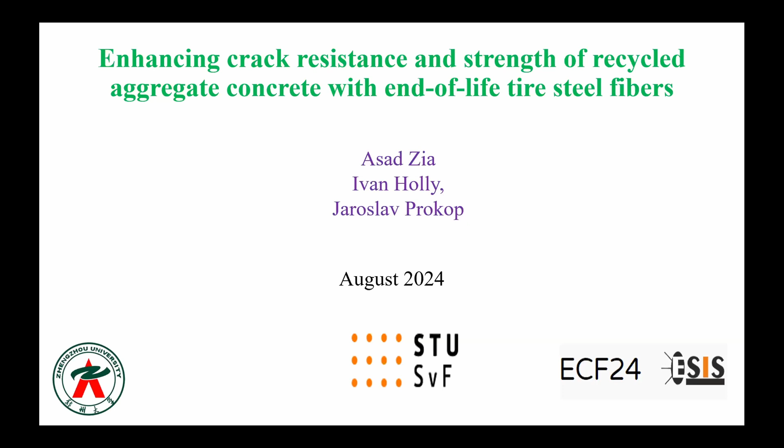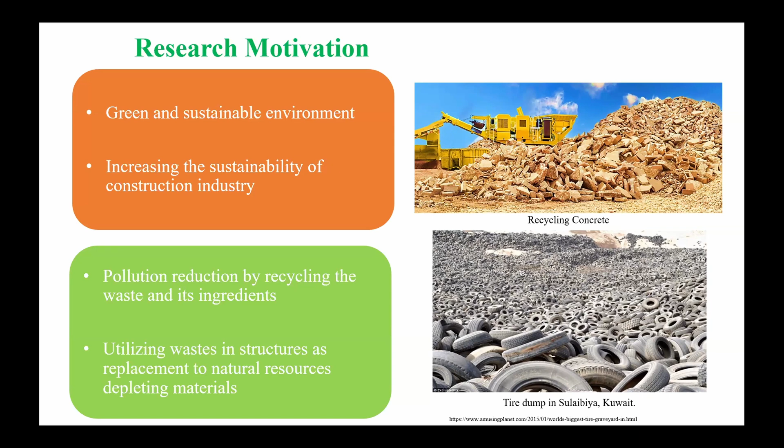The research motivation is about making our environment green and sustainable, increasing the sustainability of the construction industry, and reducing pollution by recycling waste and utilizing it in structures. Specifically, using waste steel fibers from tires combined with recycled concrete aggregates to produce new concrete, checking whether this can replace traditional concrete and achieve improved properties.

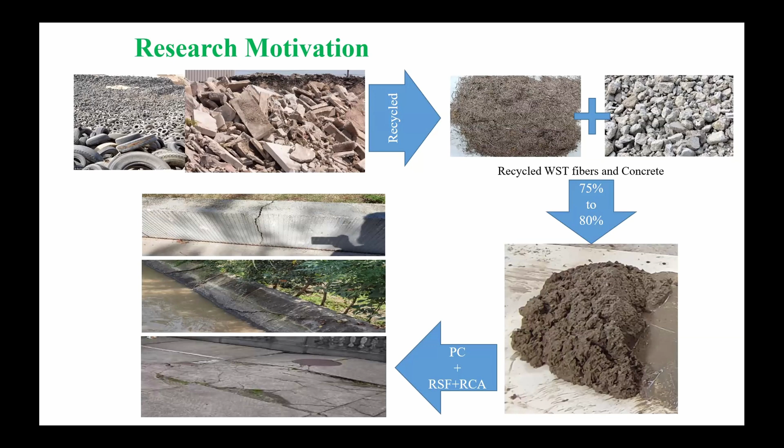There has been a lot of research in this field. Relating to pollution and waste tires, it has been predicted that by 2030 there will be up to 5 billion end-of-life tires

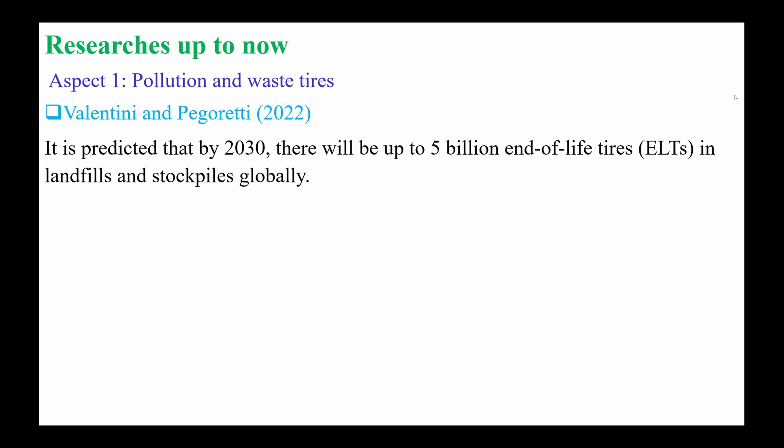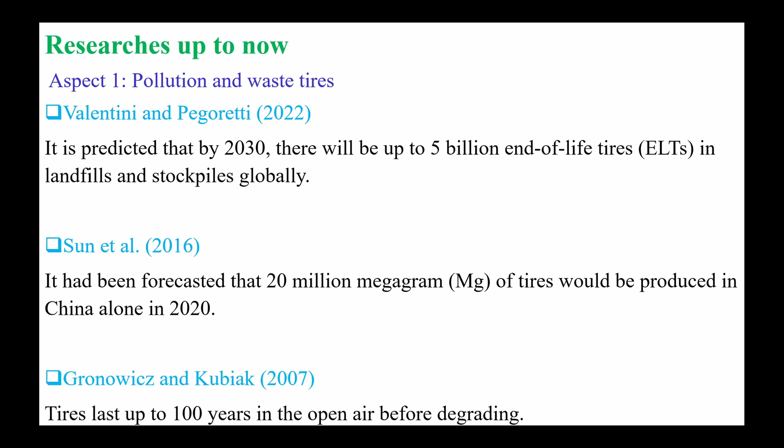in landfills and stockpiles globally. It was reported and forecasted that 20 million megagrams of tire waste will be produced in China alone in 2020. Tires last up to 100 years in the open air before degrading. The European Tyre and Rubber Manufacturing Association reported that out of the total waste tire, only a small amount, 3%, was used for civil engineering, public works, and backfilling.

It has also been reported that steel is used in tires for up to 10 to 15% of lightweight vehicles, and up to 21 to 25% in heavyweight vehicles like trucks. So discarded tire steel fiber can be used as a fiber in concrete due to its resemblance to industrial steel fibers.

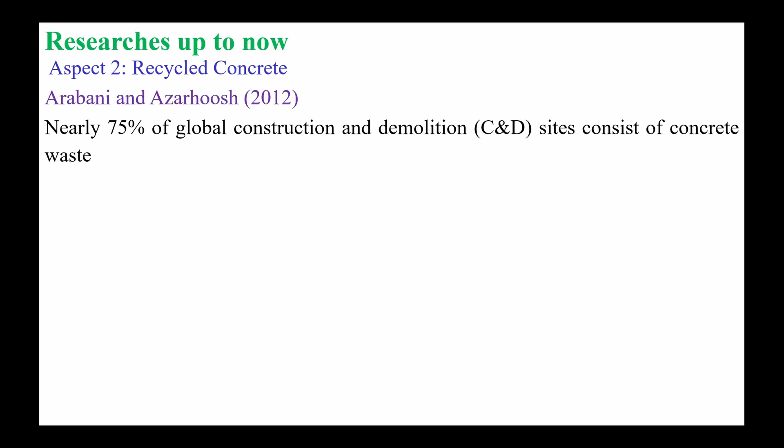The second aspect is recycled concrete. It has been reported that 75% of global construction and demolition sites consist of concrete waste, and aggregates account for about 85% of the total construction and demolition waste generated.

Sufyan et al. and other authors reported that recycling and reusing construction waste, particularly aggregates, is therefore essential for sustainable development. It is very crucial to examine the possibility of using waste concrete in new constructions.

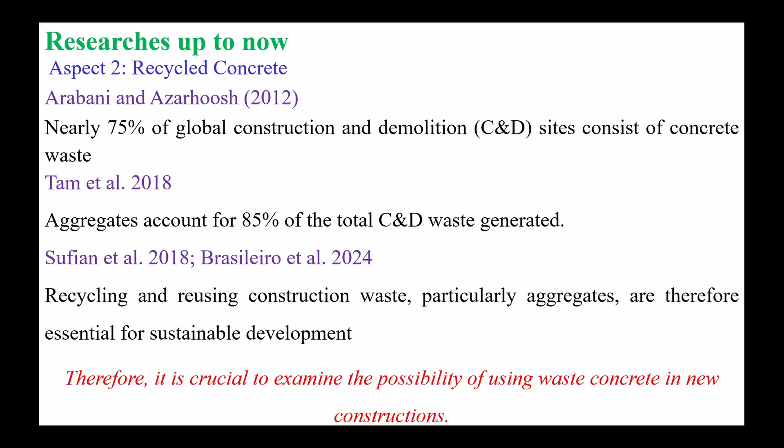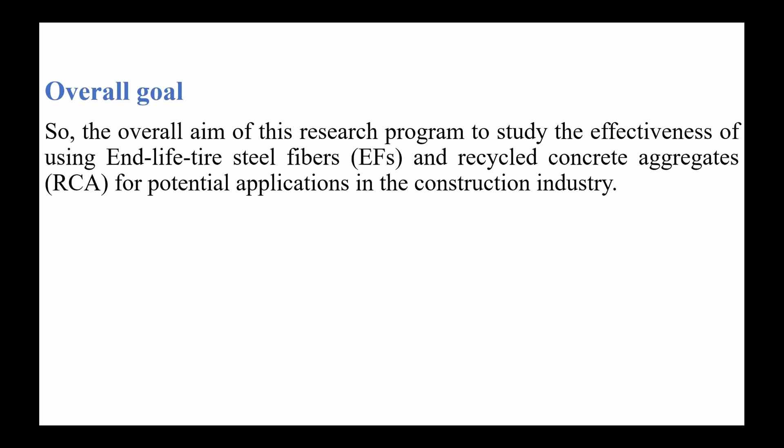The overall goal of this research is larger, and this is a tiny part of it. This research program aims to study the effectiveness of using end-of-life tire steel fibers, also called waste tire steel fibers, and recycled concrete aggregates for potential applications in the construction industry.

The specific aim of this small part of the research is the experimental evaluation of compressive properties, indirect tensile strength, and water absorption of concrete incorporating local end-of-life steel fibers and recycled concrete aggregates from Bratislava, Slovakia.

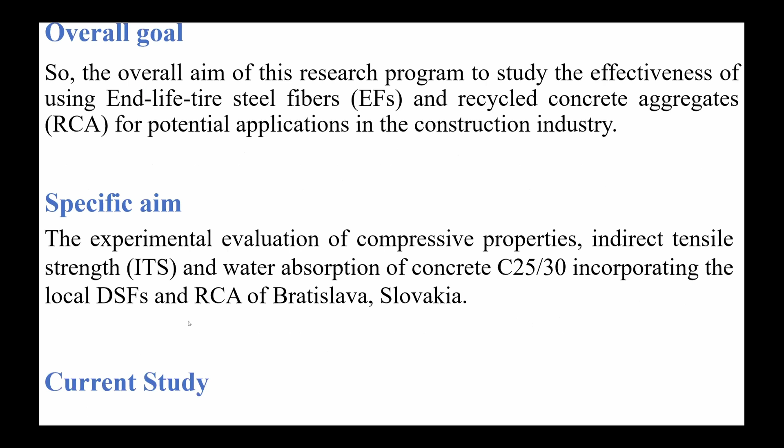To the best of our knowledge, available experimental results are insufficient to conclude the optimal dosage of end-of-life tire steel fibers and recycled concrete aggregates for particular applications in the construction industry for practical implementation.

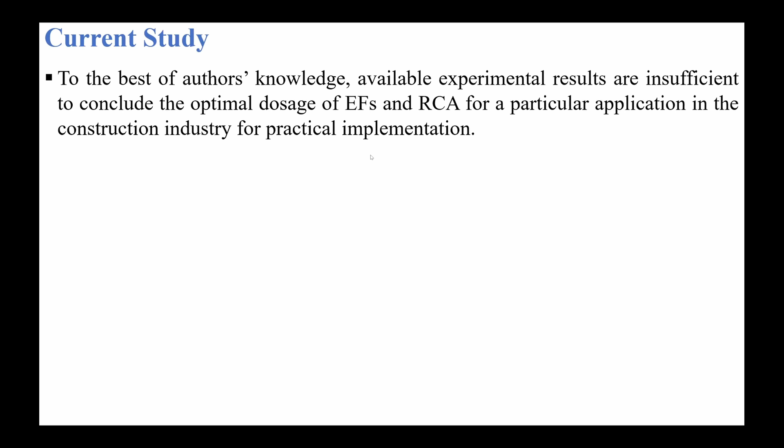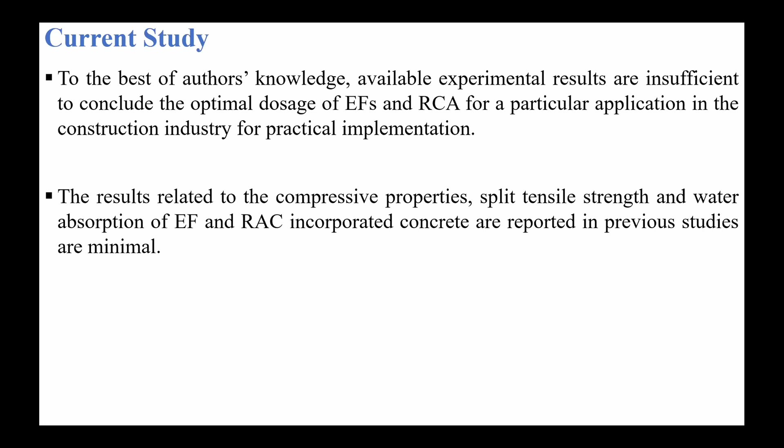The results related to compressive strength properties, split tensile strength, and water absorption of end-of-life tire steel fibers and RAC incorporated concrete reported in previous studies are minimal.

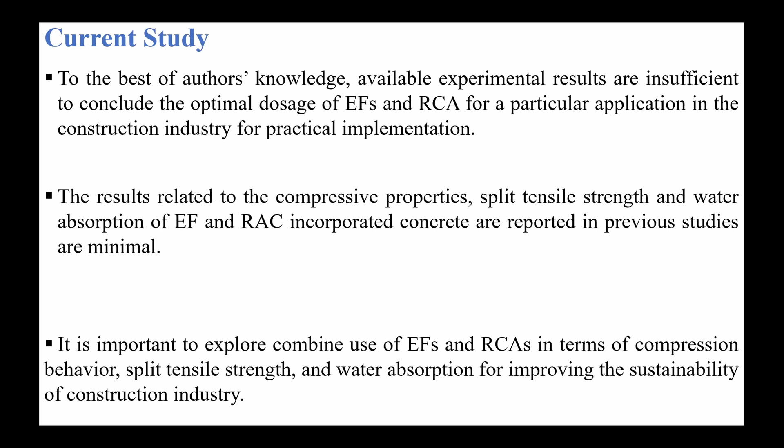So it is very important to explore a combined use of recycled fibers and recycled concrete in terms of compression behavior, split tensile strength, and water absorption for improving the sustainability of the construction industry.

In this study, the scope of work is the concrete that was available. We designed our mix according to C25/30, and 0.6% of the fibers were used as recycled fiber, and 0.6% of industrial steel fibers were used as a reference. These were added by volume fractions.

The locally available fibers were provided by Fibercom company. These are the dimensions of the recycled steel fibers, and below are the dimensions of the industrial steel fibers. In total, 6 cylinders and 3 cubes were prepared for each cast, for each batch.

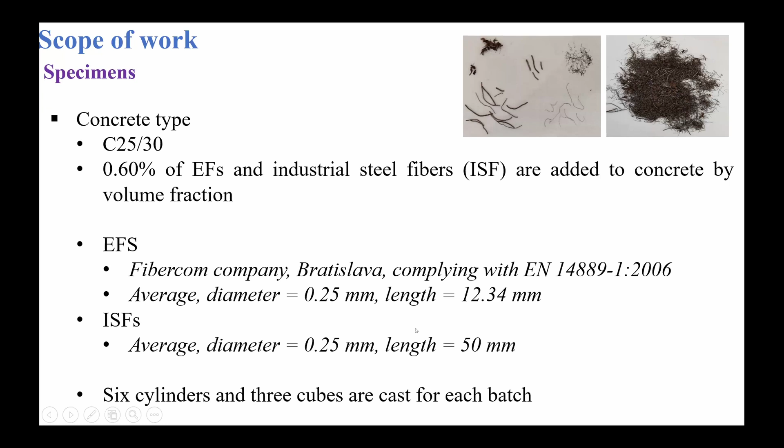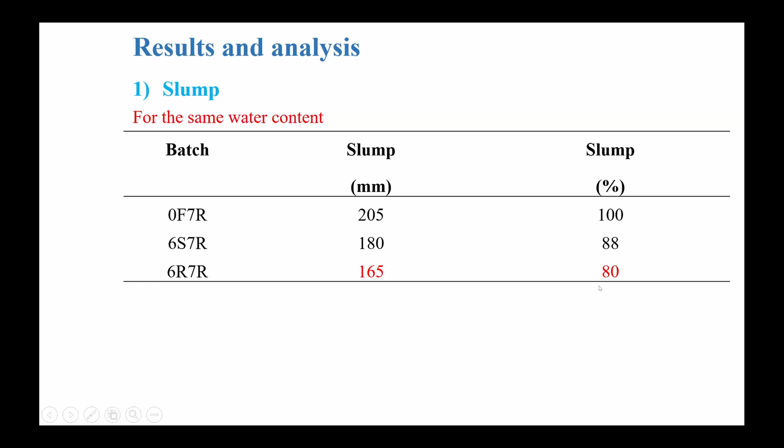Here 6S presents 0.6% of the industrial steel fibers, and 6R presents 0.6% of the recycled steel fibers, that is from the waste tires. You can see there was a significant effect of the 0.6% recycled steel fibers, and the slump decreased by 20% as compared to the plain concrete without fibers.

For the compression test results, we drew stress strain curves, and from these we also compared the compressive strength. You can see there was not much significant effect on the compressive strength, and with the recycled steel fibers, the compressive strength decreased. This is because most of the literature reviewed also concluded that using a high percentage of fiber, almost more than 0.5%, the compressive strength was not much improved, and a decline was also reported by different authors.

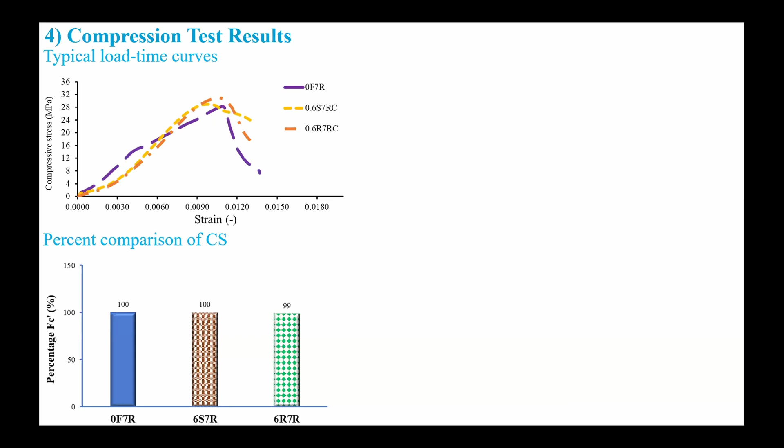We also calculated the compressive properties, that was the compressive total energy and compressive toughness index. As highlighted, the industrial steel fibers show significant improvement in compressive total energy, and the recycled fibers also show improvement in total energy to some limit. But the toughness index for both fiber concretes was higher compared to the plain concrete.

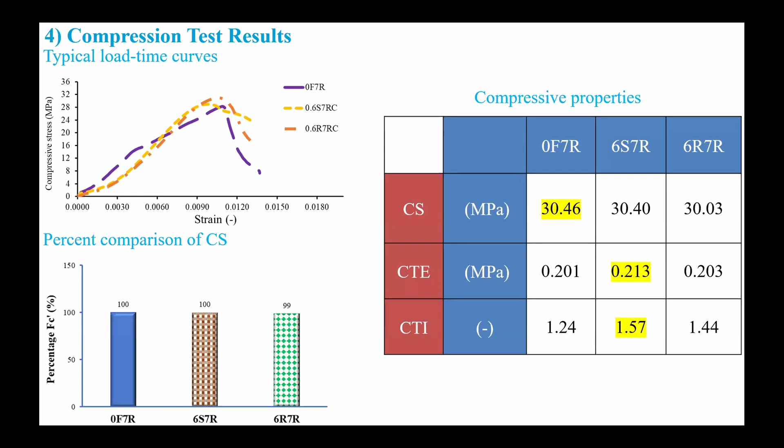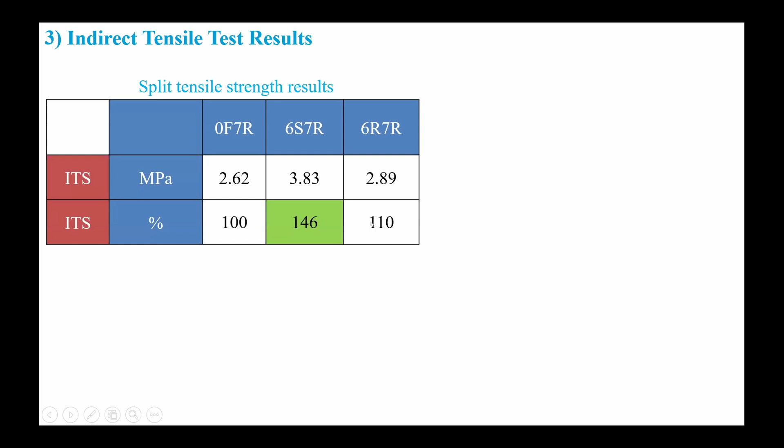By comparing the results of indirect tensile strength, also called split tensile strength, the industrial steel fibers improved the indirect tensile strength by 46%, while there was no significant improvement with the recycled steel fibers, only 10%, but still much better than the plain concrete.

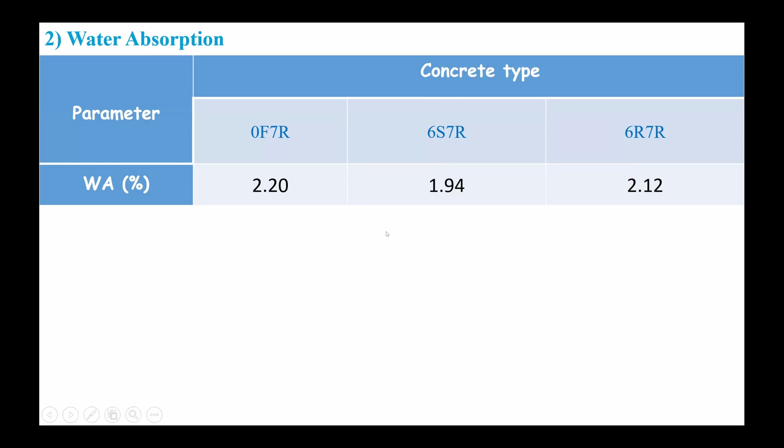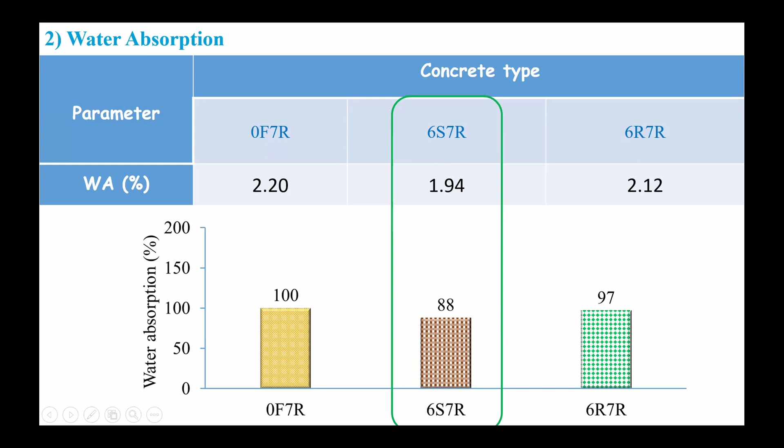For water absorption, there was somewhat of a decrease as compared to the plain concrete. The maximum decrease was for the industrial steel fiber at the same dosage. But there was also a minimal 3% decrease in water absorption at 0.6% of the recycled steel fibers compared to plain concrete.

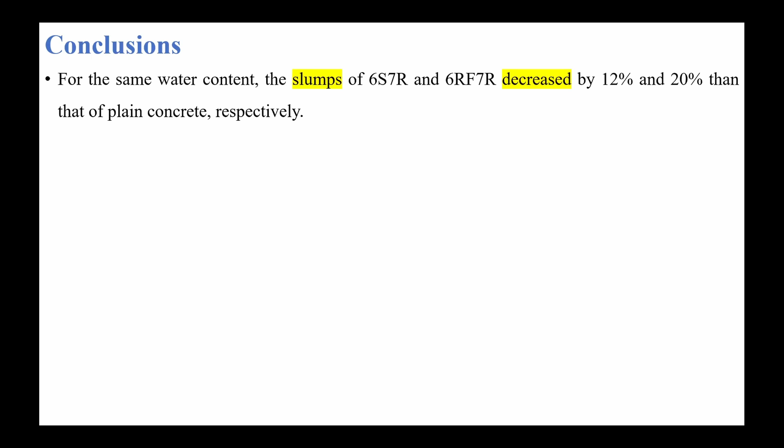Here are some conclusions from this small pilot study. For the same water content, the slumps of 6S7R, the industrial steel fiber reinforced concrete, and 6R7R, the recycled fiber reinforced concrete, decreased by 12% and 20% respectively compared to plain concrete. Also, a slight reduction is noticed in the compressive strength of the fiber concrete as compared to plain concrete.

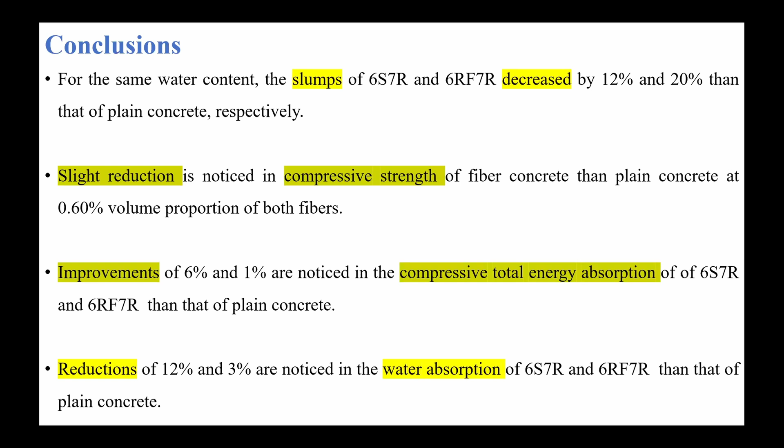Improvements are noticed in the compressive total energies of both types of fiber concrete, and reductions are noted in the water absorption for both fiber concretes as compared to the plain concrete. An enhancement of 46% and 11% is noted in the split tensile strength.

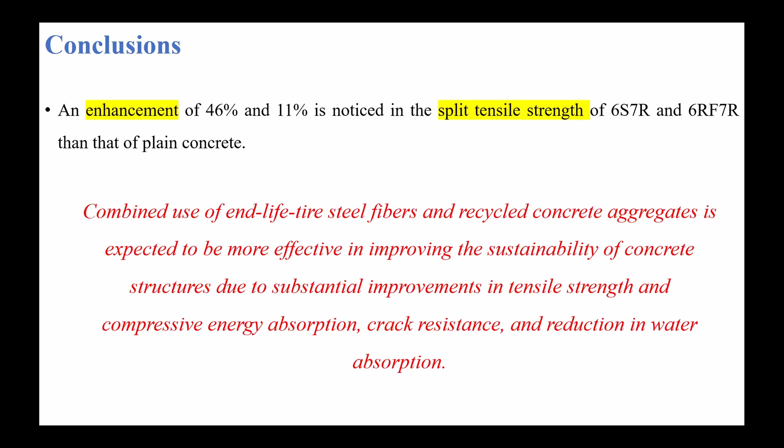So it can be concluded that the combined use of end-life-tire steel fibers and recycled concrete aggregate is expected to be more effective in improving the sustainability of concrete structures, due to substantial improvement in tensile strength and compressive energy absorption, crack resistance, and reduction in water absorption.

There are some small recommendations based on this study: evaluating the long-term performance and durability of concrete structures containing industrial steel fibers and recycled concrete aggregates for sustainable construction, and the influence of incorporating hybrid forms of discarded steel fibers, including other types of industrial steel fibers, in recycled concrete aggregate incorporated concrete.